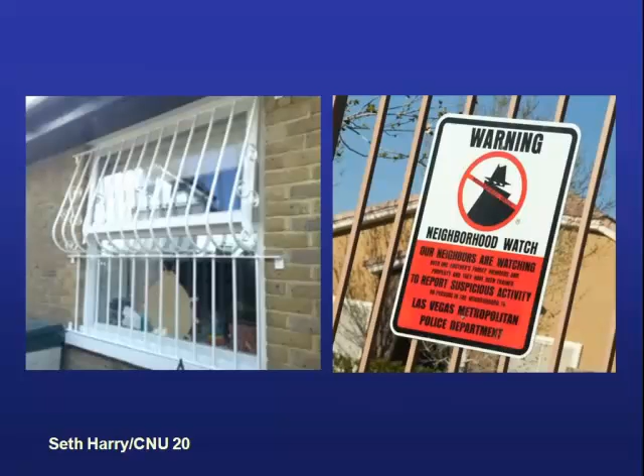Of course, if you can't afford to be inside the wall, your options are somewhat more limited to the classic window guards and neighborhood watch programs. If you can't afford to be inside the wall, you have a different challenge in suburban contexts, because typically these gated communities have no commercial or civic amenities within them. So there's a trade-off there.

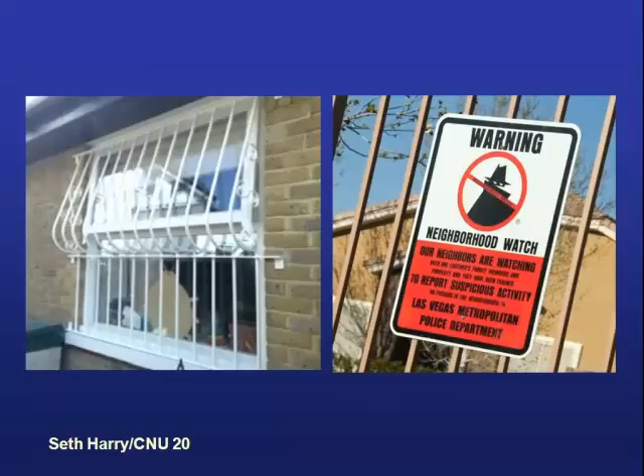And then, of course, if you live in Latin America, the issue of security has been of much more immediate relevance than what is generally perceived in the U.S., where gated communities are still considered somewhat of a luxury item, whereas in many parts of Central and Latin America, it's an absolute necessity. And of course, the form in which these security techniques and strategies take place are not always the most visually compelling, but they're also not consistent with our principles of traditional urbanism.

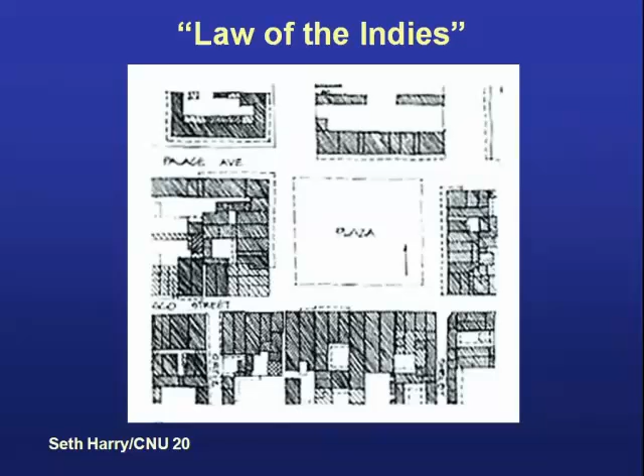Ironically, the solution has sort of been in front of us all along. The Law of the Indies, which is often interpreted as an urban design technique, a set of rules and principles, has at its heart, I think, a very practical set of considerations about security. And of course, the fact that it creates incredibly compelling and beautiful places almost sometimes seems incidental.

So we've tried to take some of those principles and adapt them into contemporary projects in Guatemala, mixed-use projects, where we recognize and understand the market imperative of being able to talk realistically and pragmatically about the issue of security, and still have projects that embody the principles of openness and interaction that we hold so dear.

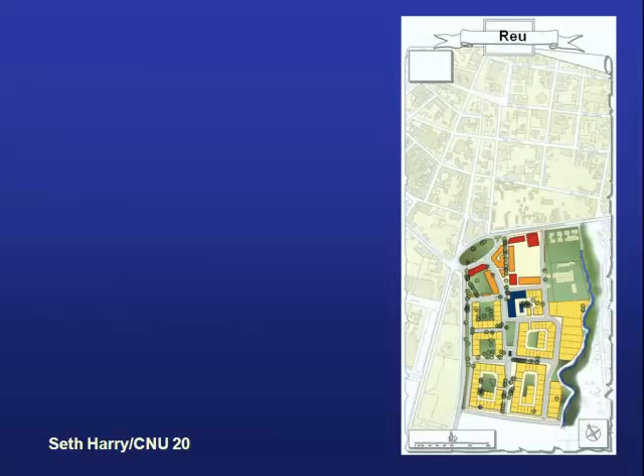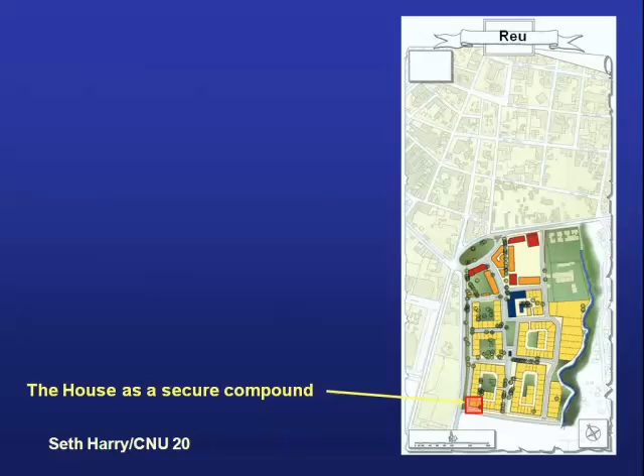So in looking at the classic traditional strategies of dealing with security based on the Law of the Indies, you have sort of a multi-level or multi-tiered approach. The first level and the most fundamental is the house as a secure compound. And then typically we set that within what we call a perimeter block, which is also secure. So you have the addition of being part of a larger secure assemblage.

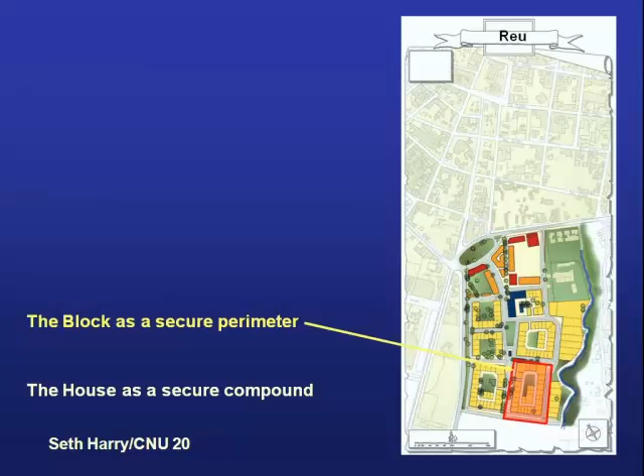And then the third level is what is typically referred to in Guatemala as the condominium, which is a secure neighborhood. This is somewhat analogous to the secure or gated communities in the U.S., in that there's typically no commercial activity within that compound.

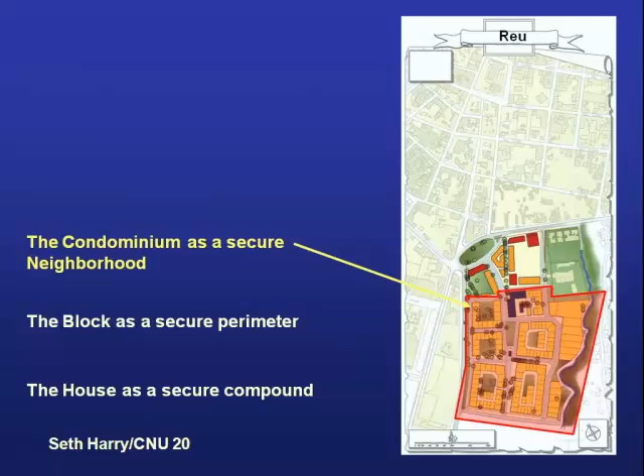The good news is the condominium is typically sized about a quarter of the size of a classic 5-minute walk neighborhood. So you can actually still do a community comprised almost exclusively of condominiums and still have a fair level of connectivity and permeability. And then the final piece is the town center, which we promote as a comprehensively managed but publicly accessible mixed-use district where different classes can intermingle.

And mind you, any commercial project in Guatemala is going to be heavily managed in terms of access, in terms of security, in terms of all of those things. So the question isn't really whether or not this is feasible, but whether or not it can be done in an urban form and in relation to a larger urban assemblage.

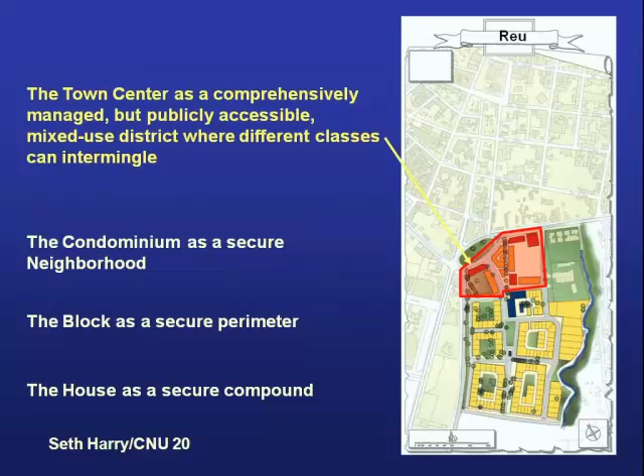And this is the town center of that project I just illustrated. It's interesting to note also that almost all the projects we do in Guatemala are market rate projects. In other words, these are not resort second home communities for affluent Americans or internationals, but places where the locals can live and work and interact.

One of the first projects we did in Guatemala, what brought me to Guatemala originally, is El Naranjo, which Jaime actually brought me down for, and this is the master plan for this on the left. What you can see here, I'm just illustrating diagrammatically how what looks like a wonderful new urbanist plan can actually be comprised of individual discrete subcomponents.

In this particular case, these are all individually gated condominiums. And you can see they take the form of a traditional larger urban place, and the hope and the expectation is that at some point in the future, should the security situation in Guatemala be better resolved, that we can open up those walls, open up those gates, and make these condominiums part of a larger community structure.

The red there indicates the town center, and then we have in blue two more dedicated, focused districts. One's an industrial park, and the other one is sort of an office campus or downtown, and something that we proposed, which was a more conventional North American type model of retail center.

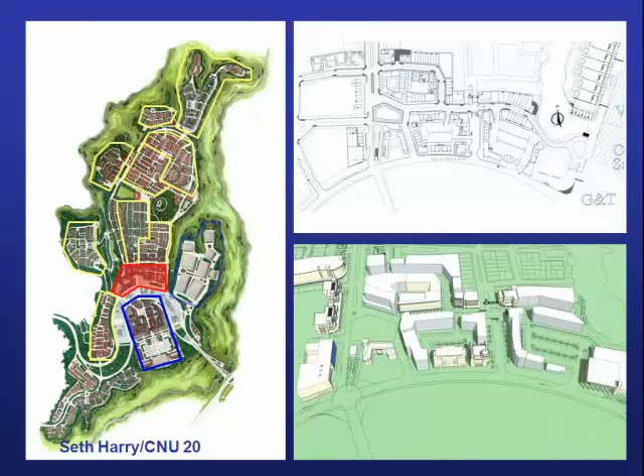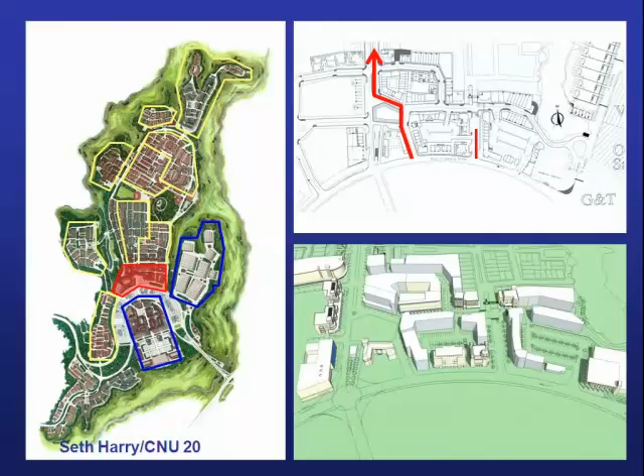We often do architectural charrettes, bringing architects in to divide up the town center into individual pieces. I'll show an example later that Leon Krier presented yesterday. The idea is you come through the town center or village center into the individual neighborhoods, so regardless of the mix of classes within the community, there's an opportunity for everybody to intermingle effectively as a group and as a community.

This is a current Google Earth image of that same project, so you can see it now in three-dimensional. These are all actual condominiums, and this is the site for the town center, which you saw the design for in the previous slide. We've actually already brought in a grocery store, a Paiz, which has subsequently been bought out by Walmart.

The point is we're building this project out incrementally on the basis and principles of new urbanism, and you'll also notice there's this green corridor through the middle. That's a subsequent phase. These are higher density, secure building types, more or less analogous to a doorman apartment building in Mexico.

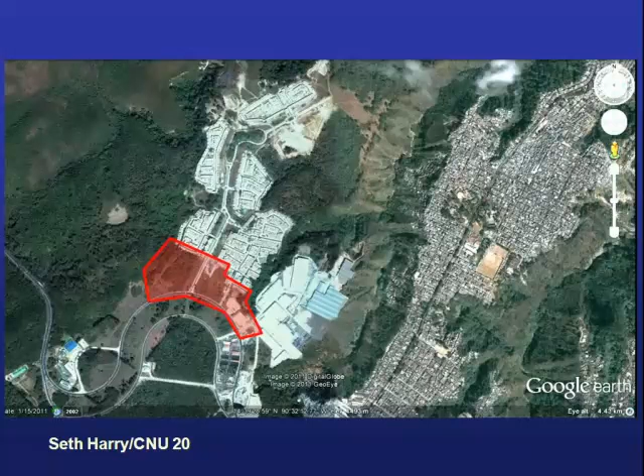What's interesting is in Guatemala, multifamily is actually more typically associated with the upper classes. This is an affordable middle class community, so we haven't yet— the developer has been focusing almost exclusively on the single family units, but we think as the project builds out, the demand for those product types will increase also.

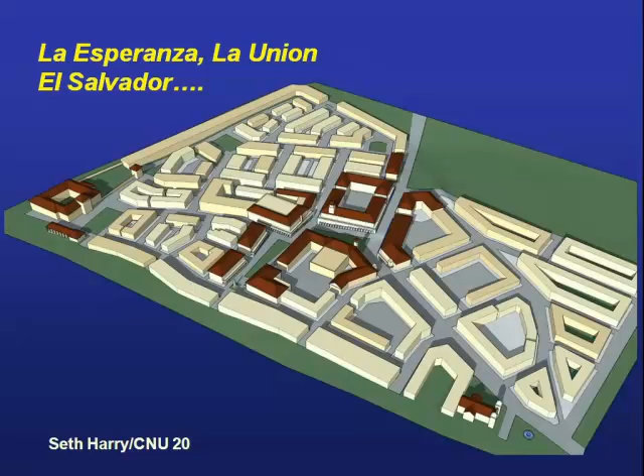In El Salvador, Jaime and I again worked with our local colleague Juan Pablo Rosales, who I should have mentioned earlier, and Eddie Castillo, another Guatemalan architect and urban designer, and we applied the same idea to an infill site in El Salvador. In this case, we captured an existing roadway that came through the site, followed that trajectory, brought it through the site, and built both sides.

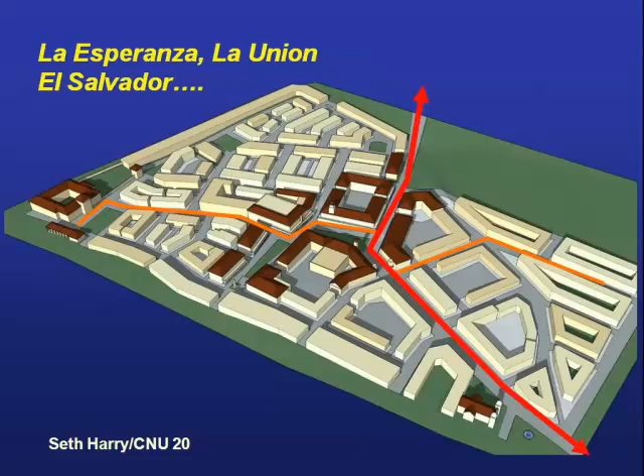So our town center in this particular case is right here. The security isn't quite as challenging in El Salvador, so we didn't get to the level of the condominiums, but the individual blocks are secure. This is sort of a level 2 security, but the town center is still an open place. Because of that, we could bring these secondary roads through the town center to drive traffic in and energize the commercial there.

This is a project we worked on late last year. This is Antigua, Guatemala right here, the project you saw at the beginning of the presentation. This is a large coffee plantation that we're designing an urban extension to Antigua for.

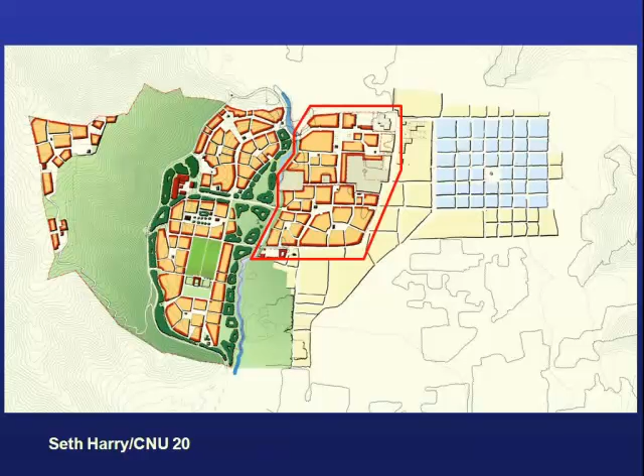Here's one where we used gradations of security. This initial phase is completely open. The blocks are secure—this is the commercial precincts. Then as you move further into the site, we increase the levels of security, and at some point we get into the secure condominiums.

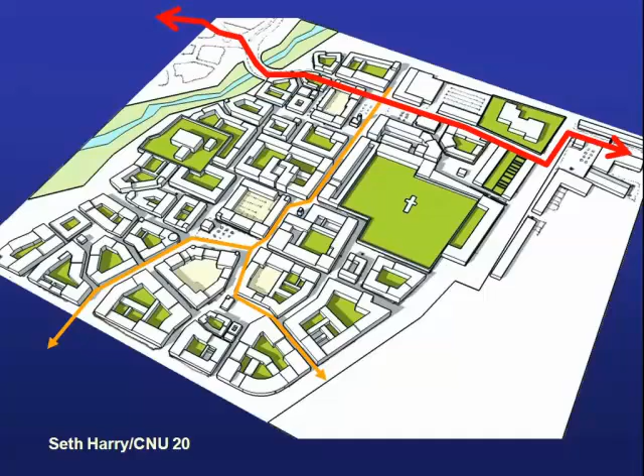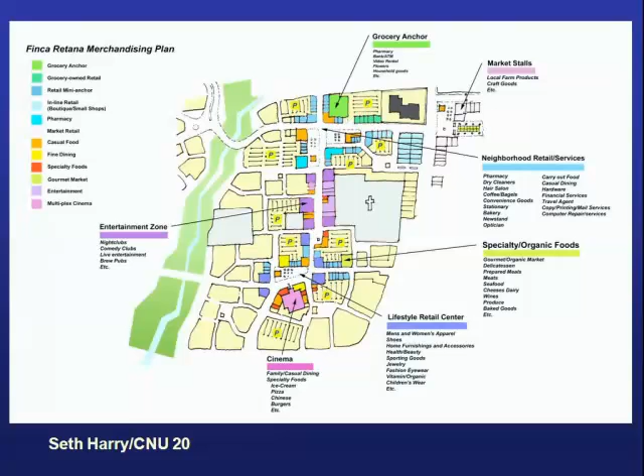This is a conceptual merchandising plan we developed during the charrette process to show how, even though these look like and cue from very traditional models of urban form, they're merchandised just like conventional American retail projects. We're trying to use these traditional models to build contemporary, successful, practical, commercial mixed-use centers that succeed in the marketplace and embody all of those principles.

This is the town center of one of our projects that we did with Jaime, Juan Pablo, and Leon Krier. Leon Krier came in and did the master plan for the entire project as well as the town center. This embodies all of the principles we've been talking about, all of these techniques and strategies.

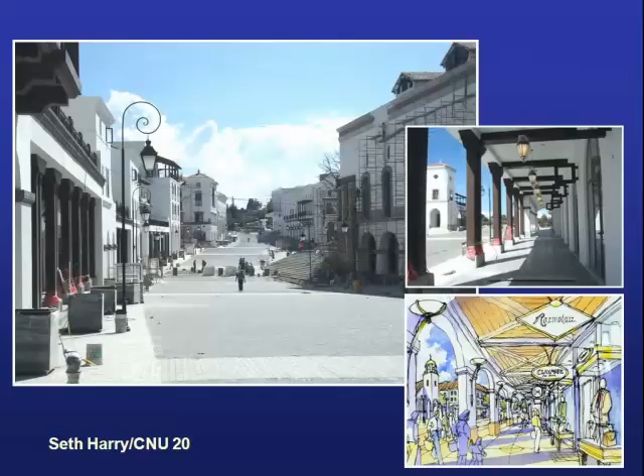This was just prior to opening, on my last trip to Guatemala. The project has been very, very successful, and I think will help change a lot of the attitudes and skepticism about the practicality of this approach. I'm closing with this image.

This is a sketch I did for a town center we're designing, again for a project that was originally master planned by Leon Krier. He did this shortly after we finished the other project in Guatemala, and I introduced him to one of my clients. This is in Northern California.

You can see that there's virtually no distinction between the quality of the physical environment and the viability of the commercial precinct based on these principles, whether in the U.S. or Latin America. So this is a very practical approach using the traditional principles of urban design in that region.

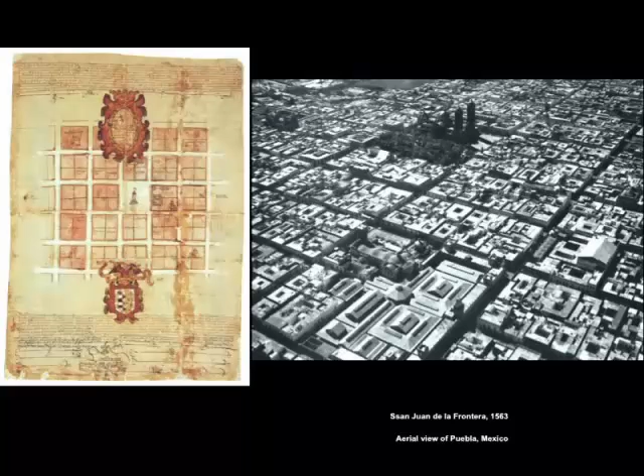You can see an example of that consolidation process in an image that always surprises me: the incredible density, the incredible power of the grid here in Mexico, in the city of Puebla.

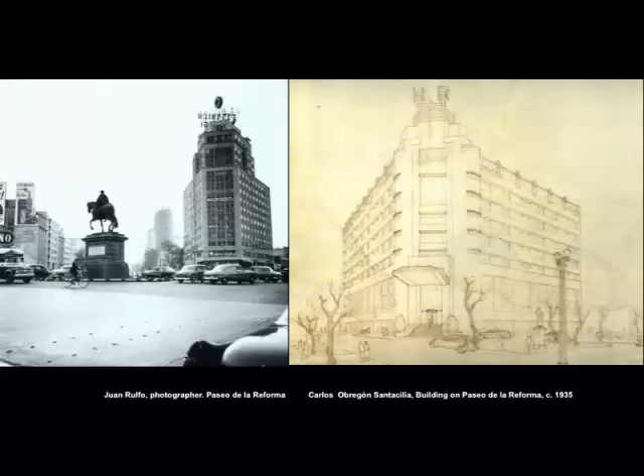Also in this perspective, grand boulevards were established. This is the Paseo de la Reforma, one of the grandest boulevards in Latin America here in Mexico City, built essentially on the model of the Champs-Élysées, and certainly not missing in the same grandeur and same importance.

I put here on the right one building, a very important modern structure of the mid 1930s in Mexico City, which shows the radical change that takes place in the 20th century, pretty much at the beginning of the century, in pretty much all Latin American cities: the pass from a horizontal, hyper-horizontal city—in fact half the height that Leon Krier would like us to believe is the necessary height—into something that will explode vertically.

You can see the beginnings of that very clearly here, influenced of course by some French development, but also by American developments such as skyscrapers and so on.

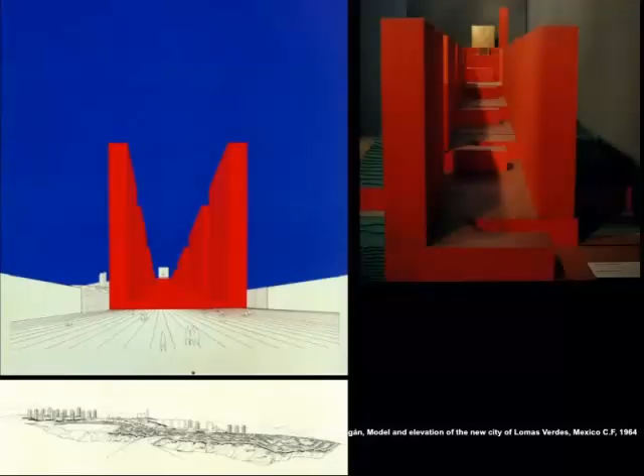Some of the extraordinary integration of houses with the landscape, and integration also of modern architecture with the landscape. One project I think is among the most interesting in Latin America is an unbuilt project by Luis Barragan for a new town outside Mexico City, whose heart would be a grand boulevard built up as a series of platforms in the pre-Columbian manner. These are extraordinary drawings and models that exist of that unbuilt project.

Now, very quickly in Argentina, Buenos Aires, a city essentially of horizontal line, as described well by Corbusier, Werner Hegemann, and many others, but very quickly in the 1920s and 1930s it explodes vertically, first through codes related to the New York City Code of 1916, but later more modern codes. What you see here is the decomposition of the urban block driven by the new codes that followed after 1945, which eventually prevented the maintenance of the courtyard structure of Buenos Aires and started dislocating the traditional urban fabric.

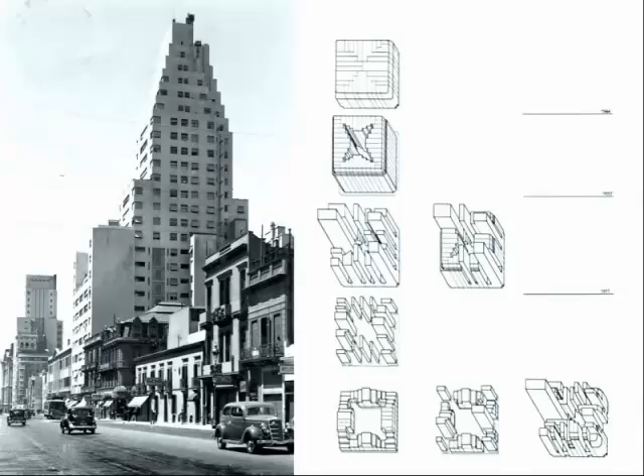I think Latin America reminds us that density of population, growth of population, and hyper-centralization of cities is a major issue. It actually shows that building 3 or 4 story high neighborhoods already didn't work in the 1940s, it was already too low density. You had to go further and imagine more. Buenos Aires is an extremely beautiful example of a city that's more or less 8-10 stories high and functions quite well, even with its problems, and it also has some of the most beautiful skyscrapers in the history of the Americas, like the Kavanagh from the 1930s.

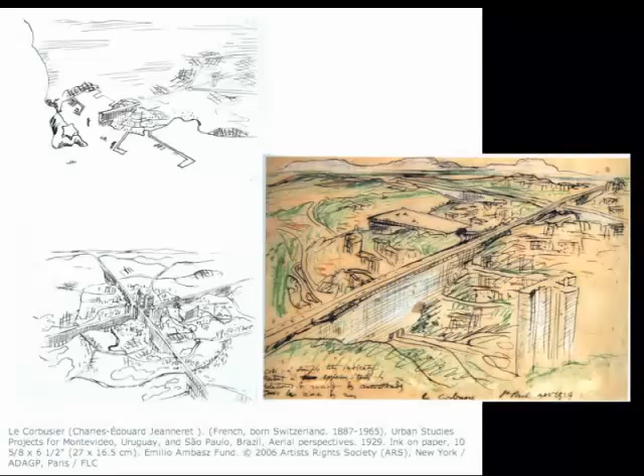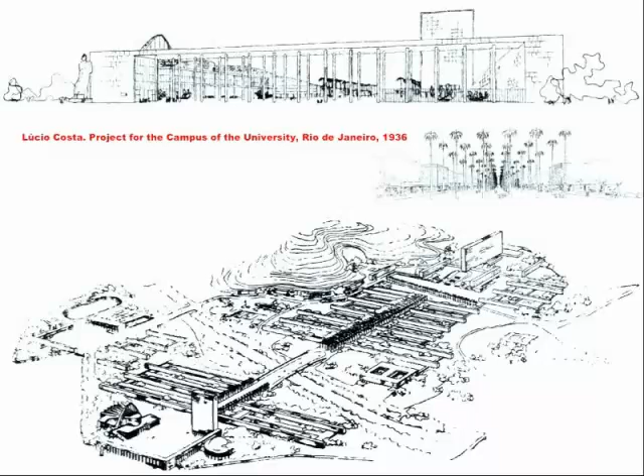I'm going to go a little faster here. Some important projects also for urban campuses, here by Lucio Costa in Rio de Janeiro, an unfortunately unbuilt campus that would have been entered through an incredibly important square with a theater, a very tall administration tower, and a grand portico you can see here at the top, with a great axis throughout the landscape, unfortunately unbuilt.

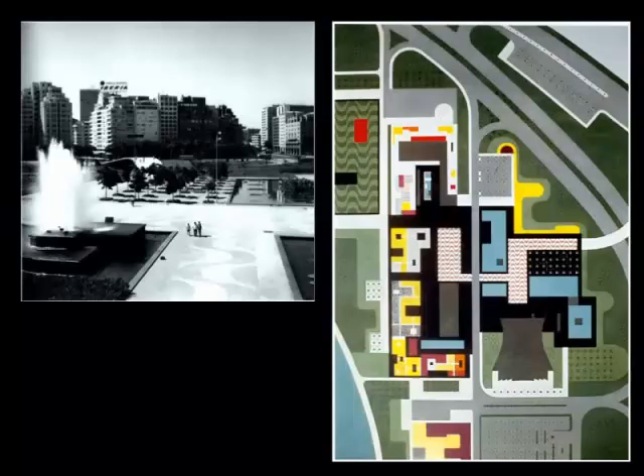And ending with Roberto Burle Marx and the tradition of parks in Latin America, Venezuela, Brazil, and many others. The praça understood as a reinterpretation, graphically, of modern painting and abstract painting, used to draw the plans of the praça, eventually creating absolutely humane and very friendly spaces.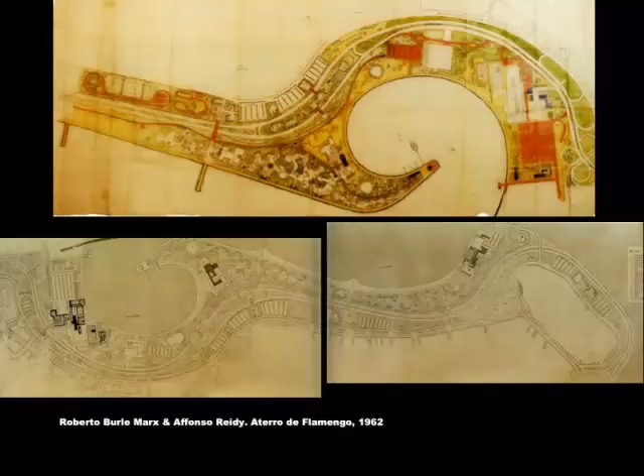Perhaps one of the greatest projects in the history of urbanism in the 20th century anywhere is the great Aterro do Flamengo, a praça 5 miles long built along the Guanabara Bay, adding to the praça that had been started 60 years earlier. It also contains important public structures and receives approximately 200,000 to 300,000 people every day, who at the end of the day move down from the neighborhoods, go to the praça, and recede back into the neighborhoods systematically, creating perhaps one of the greatest complexes of public space.

And here you can see it at the time of inauguration, leading toward the sugar loaf. And of course, we couldn't finish talking about Latin America without mentioning Brasilia.

The cross in the desert that you see here is the foundation axis of Brasilia, but also represents the paradox of Indian life, savage life in a certain way, and technology, in this quite extraordinary photograph. Brasilia is not possible to think about without thinking about Tenochtitlan or Teotihuacan and the urban spaces of pre-Columbian America, which are extremely large and only gather people for very specific purposes.

Also important, and a little provocative, is that Brasilia was actually built upon the system of neighborhoods. Contrary to what many people think, the model for the neighborhood of Brasilia was the famous diagram of Perry and Clarence Stein, later reinterpreted by Andres Duany and other new urbanists. That diagram was fundamental in Lucio Costa's vision for Brasilia, and you can see how it was adapted using four neighborhoods organized around a cross-axis of services.

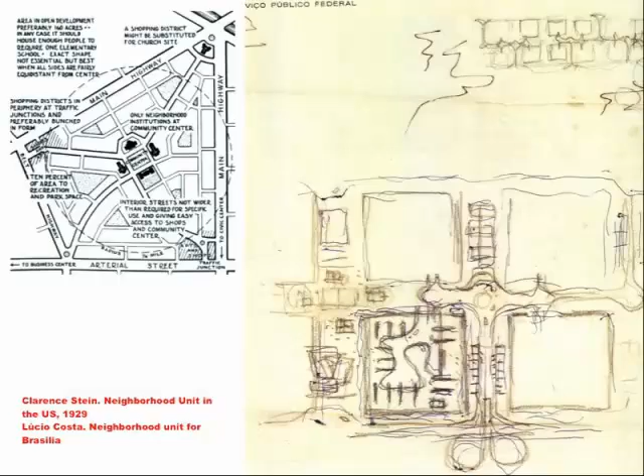Brasilia is a very special place, but even though it has very few traditional streets, it is almost a gigantic garden, a sort of modern garden city. That's pretty much what Brasilia is in reality. When you see it in this contemporary image, it is a very different and much more humane environment than the traditional images we see from the early 60s.

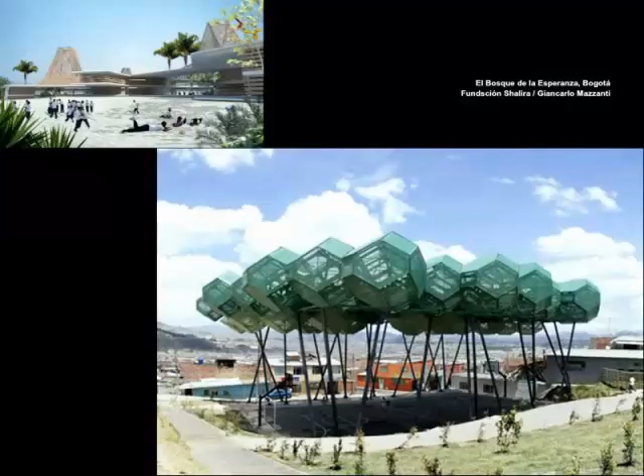My last image is an image of hope, transitioning to Adib Cure, which is essentially informal urbanism in Latin America. This is called El Bosque de la Esperanza, the Forest of Hope, a project in a favela in Colombia designed by Giancarlo Mazzanti for the Shakira Foundation to help poor people and poor neighborhoods develop the infrastructure they need. That is the new frontier of Latin American urbanism, where perhaps the most interesting things built anywhere in the world, in terms of the relationship between private and public space, are happening. Thank you.

There you go. This was a rush.

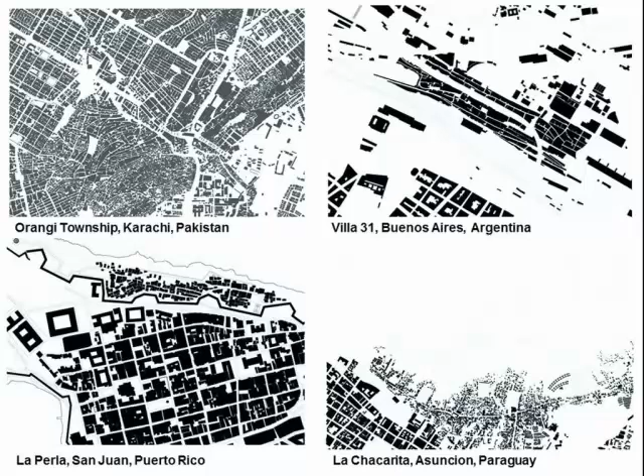One such example happens in the villas in Buenos Aires, something we've seen occur often in Latin America. Furthermore, while methods of construction are continuously evolving from less permanent to more permanent materials, the urban patterns in the subdivisions of land are remarkably resilient. For this reason, the figure ground drawing is a useful and valuable tool in understanding the overall and, in many instances, permanent aspects of the informal.

The figure grounds you've seen here were produced over a few weeks, and in some cases were drawings produced on site, revealing striking similarities as well as several notable differences. We found, for example, that generally the informal cities were compact with clearly delineated boundaries, either natural or man-made, and very few points of entry.

Their physical patterns were organic and irregular, adapting and developing incrementally over time as the needs and circumstances of the community changed. Their built fabric was denser than that of the formal city, with an incredibly complex network of very small pedestrian scale streets and relatively few public open spaces. Oftentimes there was no clear hierarchy between the public realm and the built fabric, and many buildings were mixed use, with commercial and public functions occurring in small increments throughout the entire city.

This last observation was confirmed by on-site documentation both in Latin America and abroad - in India, it's the same case. Despite these similarities, the drawings also reveal differences that could be attributed to the local history, culture, and/or geographic circumstances of the given city.

Typically, in the case of Latin America, examples were composed of party wall buildings grouped together, as we can see in the example of El Pozón in Cartagena, Colombia. They create small blocks that continuously define the edges of the street. This manner of developing cities has been systematically used by diverse cultures, and in Latin America by way of the Spanish colonization, which we just heard Jean-François speak about very beautifully.

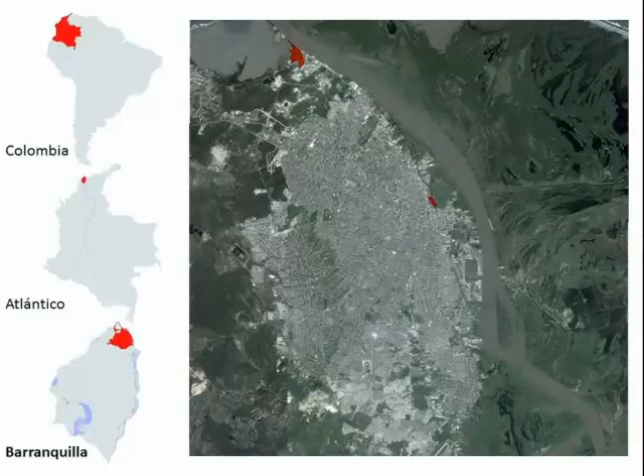We traveled there, and the specific study of Las Flores, by way of drawing, would allow us to analyze the structure of this informal city, including its districts, blocks, streets, public and private buildings, the degree of specificity of the informal city, and allow us to get a more in-depth understanding of the place.

The foundation of Las Flores lacks proper historical documentation. If I were to give you historical context, there's anecdotal evidence, like in many towns on the coast of Barranquilla. This is a kind of Macondo, Gabriel Garcia Marquez.

There's anecdotal evidence that suggests the settlement was originally established by a small group of fishermen who were displaced by the armed conflict taking place throughout the Colombian countryside beginning in the 1940s. This violent economic and political turmoil eventually led to the massive displacement of people living in the hinterlands.

The first builders of Las Flores were fishermen who arrived from nearby fishing hamlets in search of a better life. They relocated to this flat, somewhat desolate, and geographically isolated area, commonly known as Bocas de Ceniza.

Bocas de Ceniza is a great, beautiful site of natural beauty, as you can see from this image, located at the mouth of the Magdalena River and adjacent to the swamp of Mallorquín that you saw in the previous slide.

At this time, this vast fluvial landscape was populated by a variety of fish and wildlife, which overall provided the main sustenance to the early settlers.

They became fishermen. The first unpaved streets that were founded even lacked names, again like Macondo, and were most likely located closer to the now well-developed Via 40, along the southern edge of the settlement known as Barrio Nuevo. In time, these streets and the original wattle and daub houses gave way to more permanent wood structures that slowly began to reclaim the edges of the swamp.

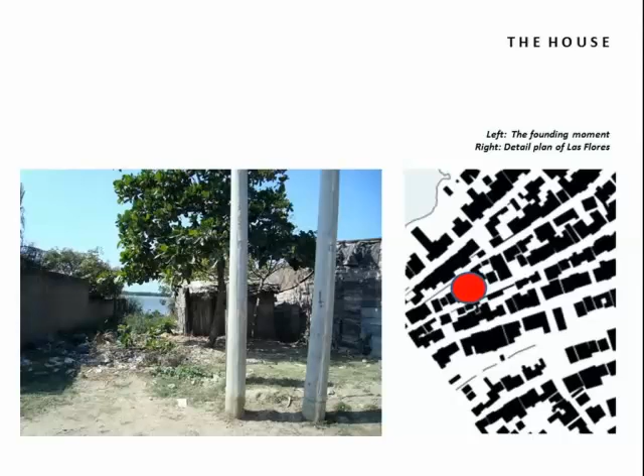These posts are tied together with a taut rope that demarcates the future front elevation of the new dwelling. The overall width of the lot is remarkably consistent from lot to lot, and is determined by tectonics. It's specifically the maximum allowable span of a conventional wood rafter, and something that allows two people to lift it and assemble it rather quickly, in some cases overnight.

The dwelling begins with the construction of a single room, measuring 4 by 4 meters, and a covered front porch. This is the first act of building the house. The space, this 4 by 4 room, 13 by 13 feet, is used for living, cooking, and sleeping. And the porch serves as an intermediate space between the single-room dwelling and the street.

Replacing the original wooden structure with a masonry one is a willful aesthetic act. They believe that wood, of course, is fragile, it weathers quickly, and is considered by the locals, in most cases, to be a poor man's material.

Masonry, on the other hand, is the prevalent building material of the former historical city of Barranquilla. Barranquilla, if you drive around, is a kind of Corbusian city, mostly concrete. So it is more permanent and associated with greater stability, both structurally and economically.

The new masonry houses built in Las Flores directly resemble those of the Barrio Bajo, which is a formal neighborhood next door. This mimetic act carries with it the hope of building a better environment, and with it, a better way of life.

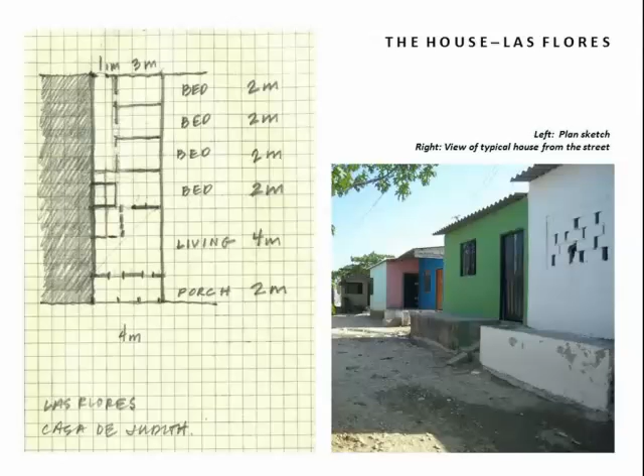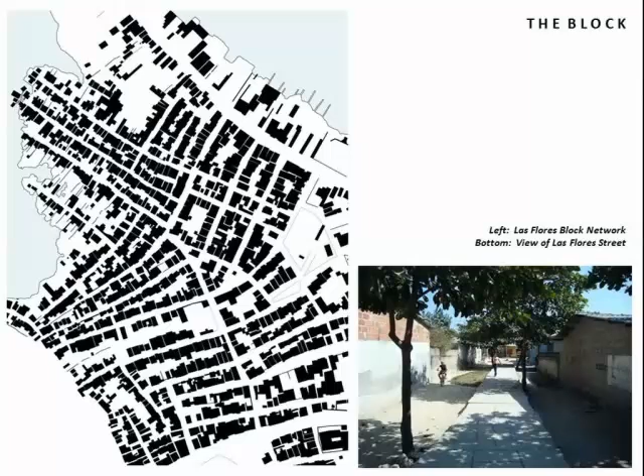This is an image of Las Flores, one of the main streets, at least from the center plaza, the Plaza de los Pescadores, which shows this very repetitive condition of porches, one after the other.

Now, public space - there's a striking lack of public open space in Las Flores, which was a discovery, a lesson that we found. The most important spaces, the soccer field and the Plaza de los Pescadores, or Fisherman's Plaza, are located near the geographic center of the settlement in close proximity to one another.

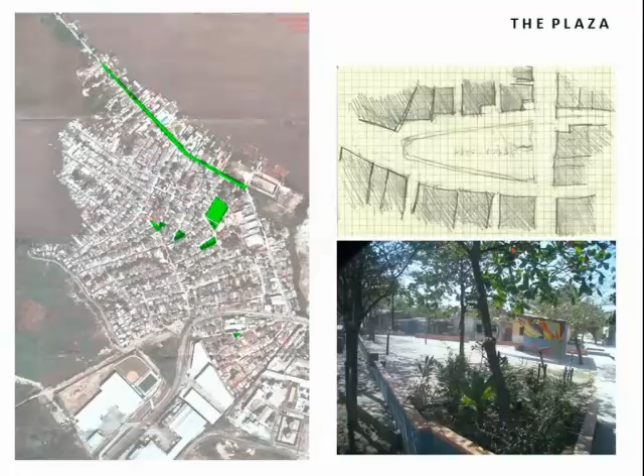An image of the plaza itself shows it is heavily landscaped. This is the plaza now from within, and then the housing stock that defines the edges of the plaza, painted very colorfully and very beautifully in some cases.

But what is important, what we found, is that even though they lack housing, and housing is very important for them, they consider this common space to be very sacred, to be kept as is and not to be invaded or squatted.

They also have very well-placed public buildings. Not many of them, but they work on the placement of the buildings in a very interesting way. One of the most important public buildings is actually the Catholic Church, at the intersection of the Old Town and La Vía 40, and the school, which is closer to the center of the neighborhood.

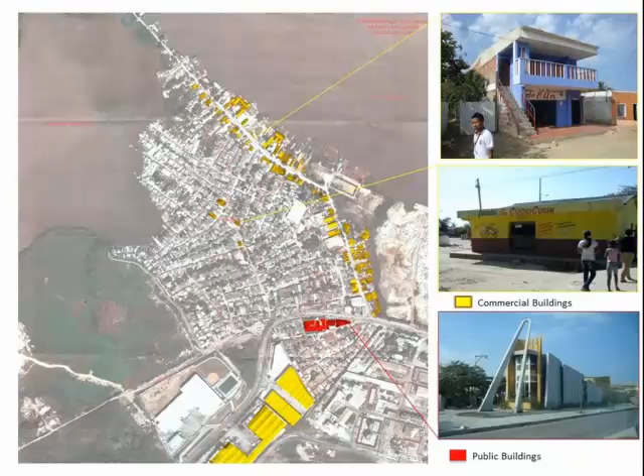This is a drawing that explains where most of these public buildings are, as well as the commercial buildings. There's an incredible amount of live-work units - it's the live-work unit city par excellence. Almost every single house has one.

We also discover one of the great lessons for us: while they do have problems with the housing itself - as I mentioned, they lack light, they lack ventilation, and so on - we felt, and we were told, that this is not necessarily the problem. The concern, or the role they think architects and urban designers could help them with, is in the design of public spaces and public buildings, which is why the work of Giancarlo Mazzanti and others in Colombia has had such a great and profound impact on the city.

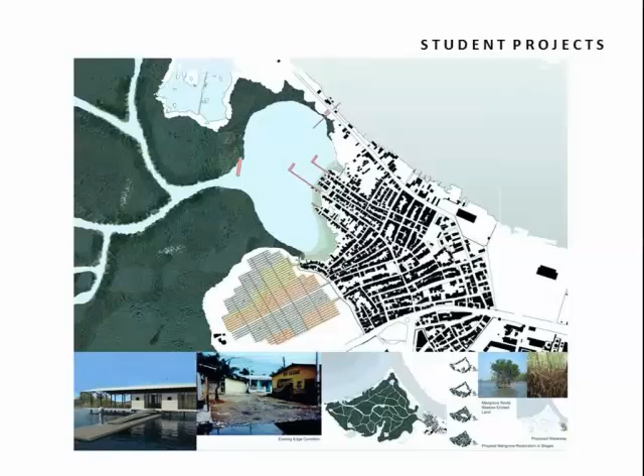When we came back to Miami after doing all this research, some of the students produced work that wasn't necessarily designing houses, but designing public projects in civic spaces. One of the most interesting was by Mike O'Neill, who's now in graduate school, who proposed a great ecological project at the scale of the country—the recovery of the swamp that would allow the city to restore its mangrove and bring back the fish.

Once the mangrove was rebuilt or recovered, it's actually a building for the nursing of fish. These are views of it. And then one other project I'll show you, I'll stop here because I know I'm over time and Jaime's about to take me away.

It's actually a project for a meeting hall for the pescadores, the fishermen, and the children. There are many children around—about 100 children who need a place to eat on a daily basis. This project was done as a response to that challenge they gave us, to design a building for that purpose.

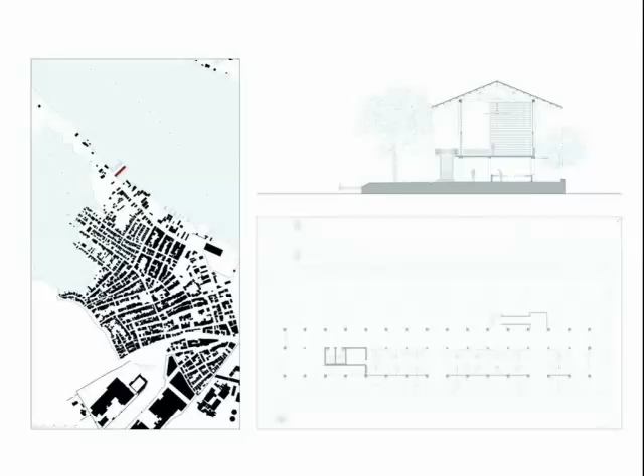The building was influenced by the local vernacular, and was ultimately designed incorporating a lot of the materials and materiality of the city, as well as the kind of vernacular aesthetic that is prevalent not only in Barranquilla, but throughout the area of the Magdalena River, and also in the manner of these great folkloric paintings that are very famous in that area of town. Thank you very much.

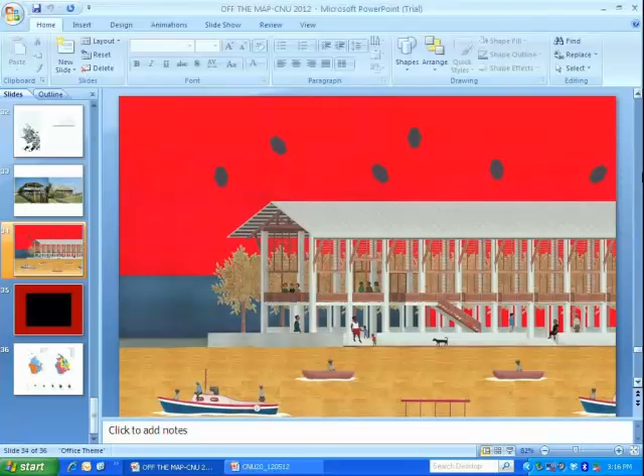I'm going to talk a little bit about space syntax. As you know, these were ideas that were developed in Europe, and I'll discuss some of the issues in trying to apply it to the Latin American city.

First, I'd like to ask who knows anything about space syntax or has heard about it? Okay, some of you.

So the key idea is to understand human activity, and once we understand this, we're going to decode the DNA of cities, and then we're going to be able to plan according to those forces.

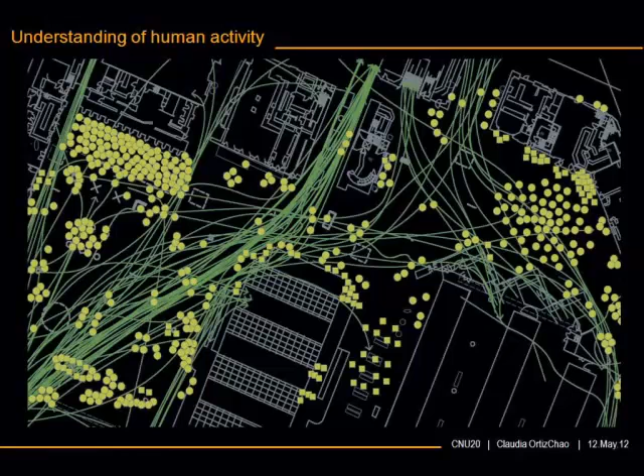This is an image of Victoria Station in London, and these are traces of how people actually move in space. We sent observers to track how people were moving and where people were stopping to do several activities. This is the sort of study behind space syntax research.

We intuitively know that human activity happens in space, right? We have the public space network, which on one hand is the space of movement—where all the flows, whether pedestrian, vehicular, etc., happen. But on the other hand, public space should also be the space for socialization, the social space.

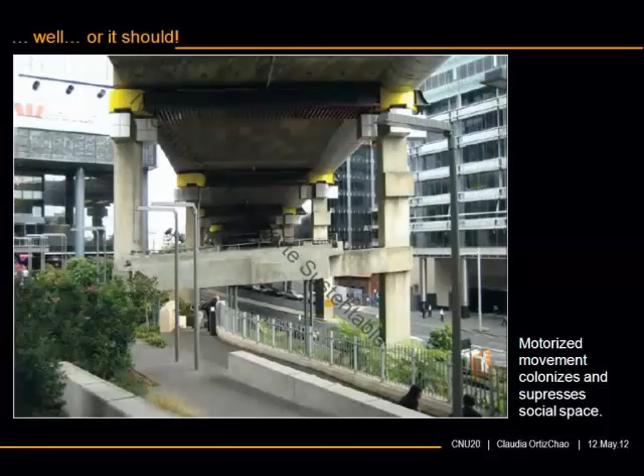Well, I put this to say, well, it should be. It doesn't necessarily, because we know the car has colonized a lot of space and has suppressed this social space, especially in Latin American cities now, which are following a lot the car-based model.

It's gone. Well, anyway, if there was a piece of a city—it's not really just any grid—and we had activities distributed along there. There's somewhere in the grid where you live, and then somewhere else where you go visit friends. Oh, he not only takes more time, but he takes the pointer. Oh, wait.

So if this was a piece of city, where there was somewhere where you lived, and somewhere else where you shopped, and then somewhere else where you visited friends, and visited your mom, and so on, all the activities we have to do, we would need to move through this grid, right?

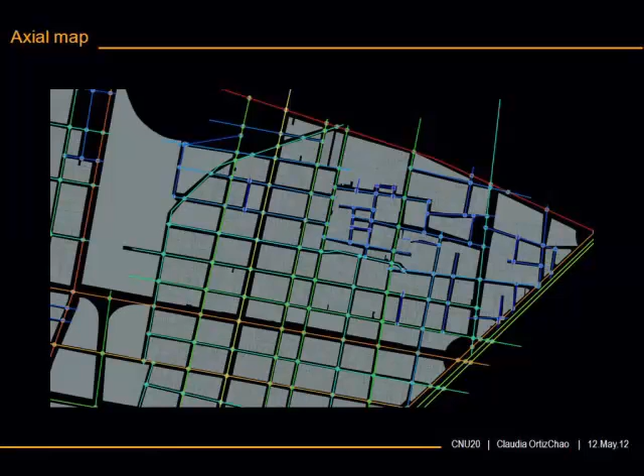Okay, I hope I'm not getting too technical. By the end of the conference you're all just disconnecting from what I'm saying.

Okay, so then he comes to his second most important idea of space syntax, which is movement economies. He says, if we have the ability to map the potential that the grid has to attract movement, then we end up with this axial map.

It's colored from warmest to coldest, where red, the warmest colors, means it's more accessible or attracts more potential movement. The dark blue is more segregated, with the least ability to attract movement. So we end up with a few very well connected, very long lines that look warmer, which—taking into consideration just the morphology, the configuration of the street layout—would be able to attract more movement.

On the other hand, we can send people to the streets and actually measure the amount of people that literally walk there—pedestrian flow. Then we can use this to calibrate our model, and it's found that generally it coincides a lot. We don't need to do much more calibration than just measuring it.

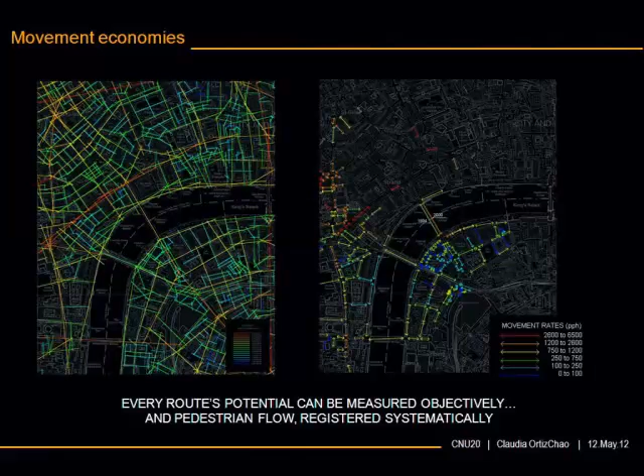We can also express this mathematically and find that there's some correlation in it. So far, it's all very happy.

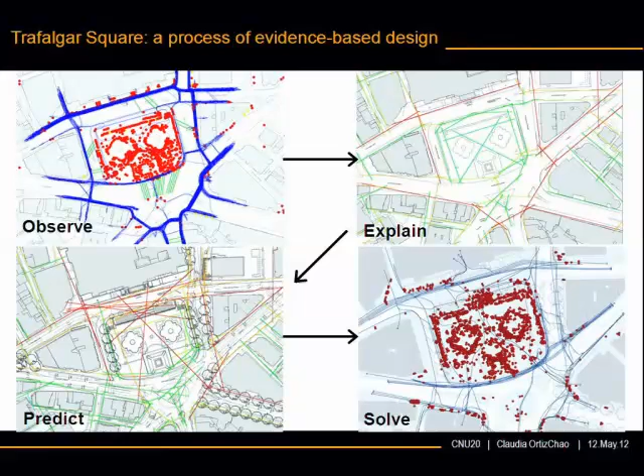And then we have examples. For example, this is a famous project they did with Norman Foster in Trafalgar Square, which was a very dead square. They did the whole study, went over there to measure what people did, modeled it, proposed something like opening up a stair here, used it to predict, and then saw what happened. This was the artist's impression, what they wanted to achieve, and this is what actually happened.

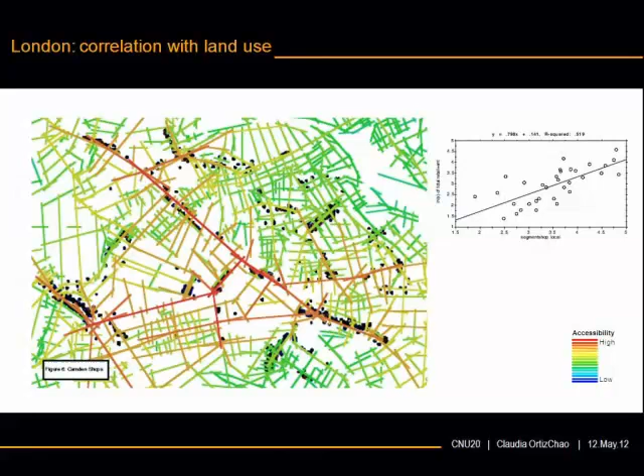So it's still very happy from here. Let's focus on the bottom-up processes. So, like I said, it was all very happy through here. However, I came up with my crazy idea of measuring this same phenomena in Latin American cities.

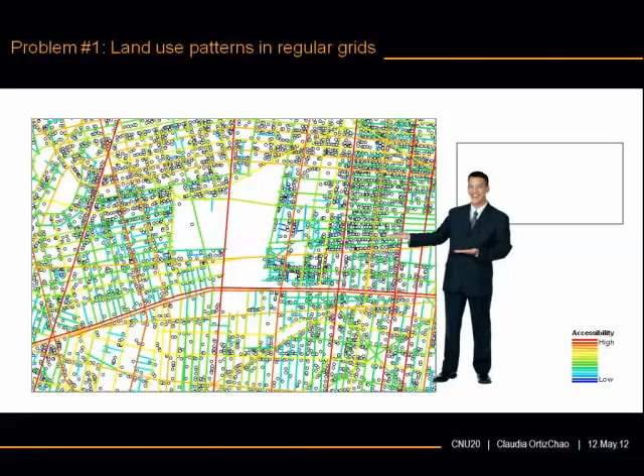As we know, it has been very nicely explained, they are geometric grids. So I came up with something like that, where again the black dots are retail. So it's all not so happy, right? But then, again, intuitively, and as an inhabitant of Mexico City, I know there are places that feel like places. So there must be something underlying there, guiding these sort of processes.

So we took a little bit of Mexico City. This is the urban sprawl, and this is the first ring, which was just a small portion, but already like 160,000 plots to study there and to look at their land uses. Some places looking something like that.

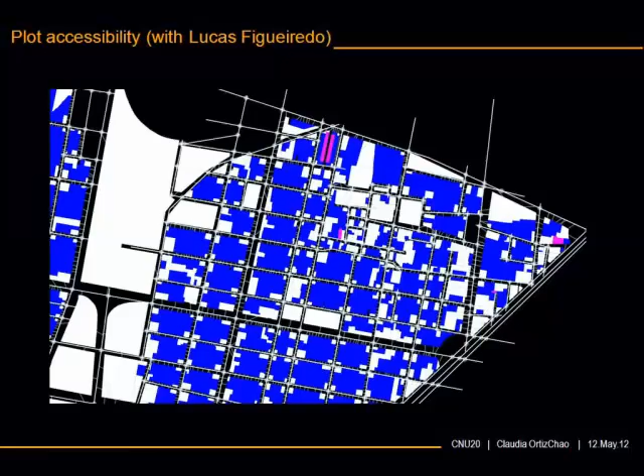And again, we did our axial map, and then we said, no, wait a second. If we cannot see a pattern visually, we probably need a scale where we look at it in more detail. So what we did is we connected the axial lines to the plots there, and then we made them nodes. And then we ended up with something like that, a little bit more complicated. That was our first methodological problem.

And then the second thing is that obviously the relation here was not so obvious as in organic cities. So instead of just using a normal correlation, we decided to use a cumulative frequency, whereas some of you know, if there was a pattern, we would be able to see it here, and if it was random, we would see no pattern there.

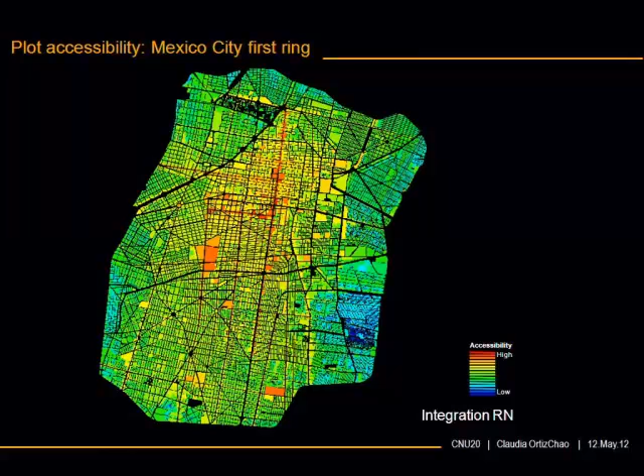So it all carried on being happy, and we came up with maps like this, which sort of made sense. This is a more local accessibility. The city center is right here. So yes, it looks sort of warm, and then we had some other centralities happening there at different scales. And then that is the global one, and it sort of made sense. This is the historical center.

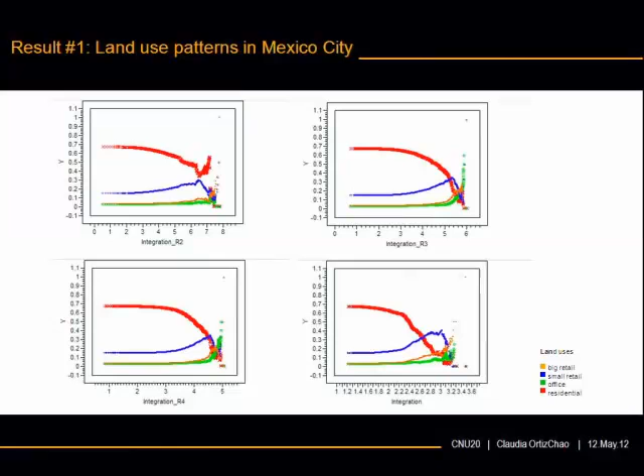But the most interesting bit is that we did find some patterns. Red here is residential, and this is the amount of accessibility. So as accessibility increased, we saw that the occurrence of residential uses went down, and other uses such as small commercial, big commercial, and offices increased. So that meant we did find some movement economy happening there.

So we said, okay, maybe we do find what Bill says, and I went to Bill and said, well, look, you were right, Bill. All this mess just to tell him, you were right. In organic cities, there's the movement economy process, both in the land use distribution and the morphology of the cities.

They're both bottom-up processes. However, in regular cities, we of course have these bottom-up forces happening in the land use distribution, but the form of the city has been largely influenced by political decisions, going back to the grid and the laws of the Indies, etc., giving it this form.

But then we went on thinking, well, but still there's also places like that. So what happens? How do we use this? How do we apply it to do the more walkable, livable, sustainable factor? So we went on a second part to see, well, maybe we could explore some of these centers that we have found.

Or some of this live center component, and on the one hand look at their morphology, their spatial and geometric characteristics, through the configuration and layout, then maybe look at the amount of provision of services available to the people in the catchment areas of these places, and then maybe look and see if there's a relation with socioeconomic groups. Maybe look at income levels and see if we can find patterns of any sort.

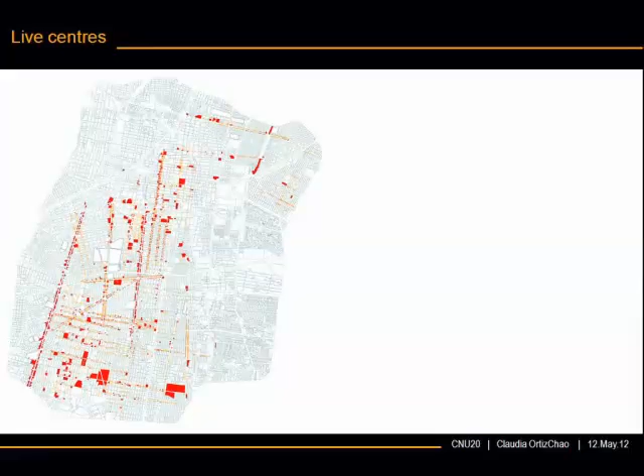And so that's the top ranks of our accessibility plots that you saw before. So from there we took these centers, then we drew some catchment areas, just normal buffers, and we started looking at all of these elements.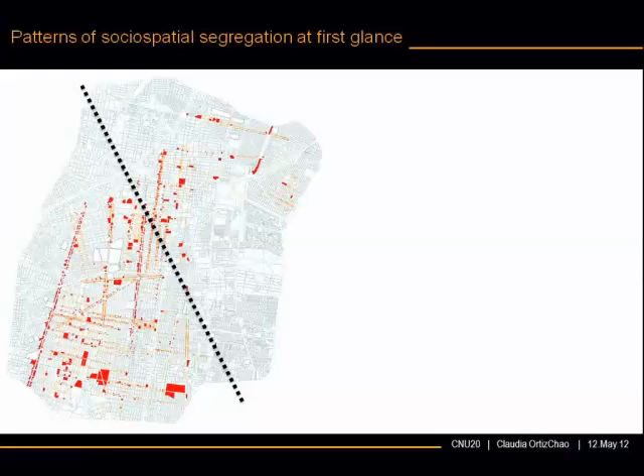First of all, what we could see at first glance, before looking at it more statistically, was that the fact that most of the centers were located on the southwest side was already telling us something - that there's a pattern of social spatial segregation, which matches what we find in the literature. This also correlated with some of the things we saw in the axial map, where most of the blue is concentrated on the east side and not the west side.

This comes with further things - this side has most of the externalities, former industrial areas are there, the lake Texcoco is there, now dried out, and it blows a lot of dust storms. They have the airport here too, which comes with a lot of noise, etc. That's a subject for another topic, but we started finding there was some relation between these patterns.

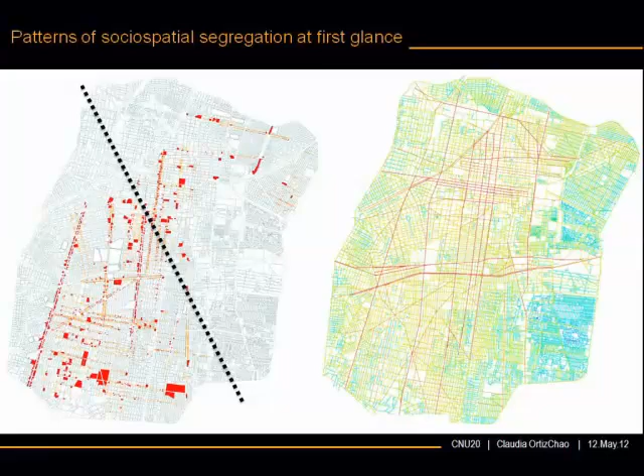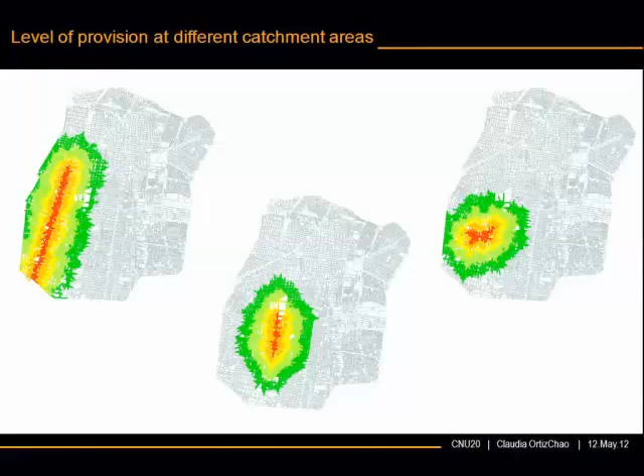Then, of course, we looked at the spatial component - how the centers were embedded in their context, whether more or less embedded at a global and local scale. We drew catchment areas over the fabric, because we're not birds, we don't fly, we walk on the fabric. We looked at provision of different things: retail, office space, health, education, leisure, open space, at three different scales: 5-minute walking, 5-minute cycling, and 5-minute by car.

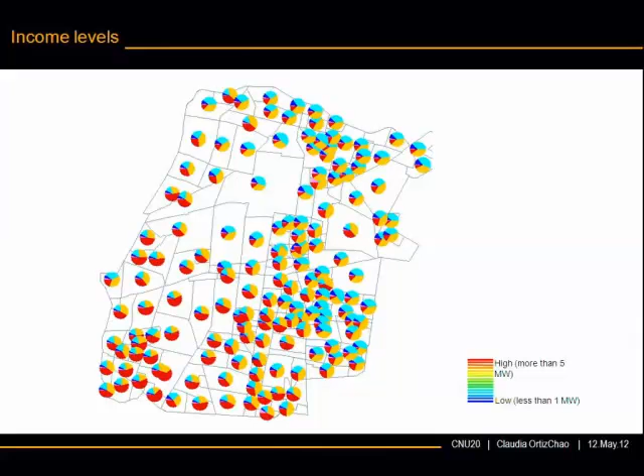So as a conclusion, we did find a relation between morphology or spatial configuration, also subtle - confirming another thing we had observed before, that there's higher accessibility north-south than east-west. And yes, we found two different types, we could group them into two types from these things we saw here.

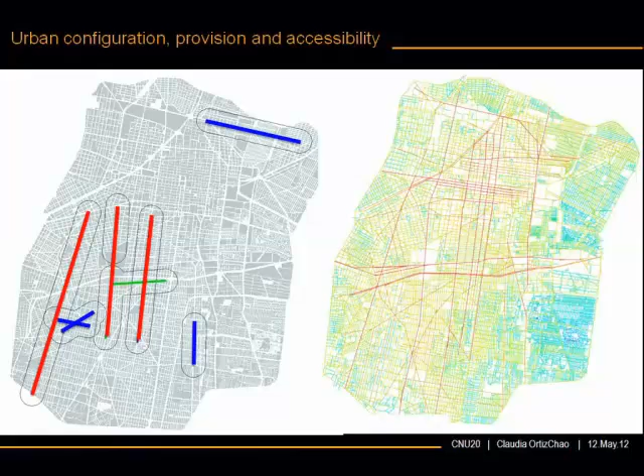Some characteristics of morphology, although subtle, were related to which centers were best and least provided. Some worked more globally and some more locally, because one had a higher amount of housing at the smaller scale, and another had a higher amount of housing at the larger scale. But mostly we found this pattern is reinforced by the planning documents - this coincides with what the planning documents here regard just as housing, where you can just build housing.

Of course, this doesn't fully happen because we find this bottom-up land use phenomena occurring - you always find the little corner store opens, then the little workshop. But that's what's on paper. And these always coincide with more mixed-use corridors. What to do from here would be how to rebalance this into the planning documents, and how to work against this lack of equity of provision. Yeah, that's it. Thank you.